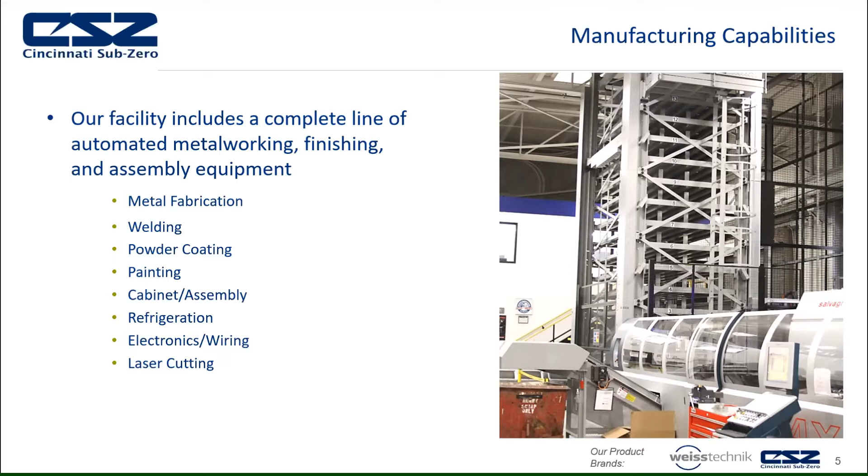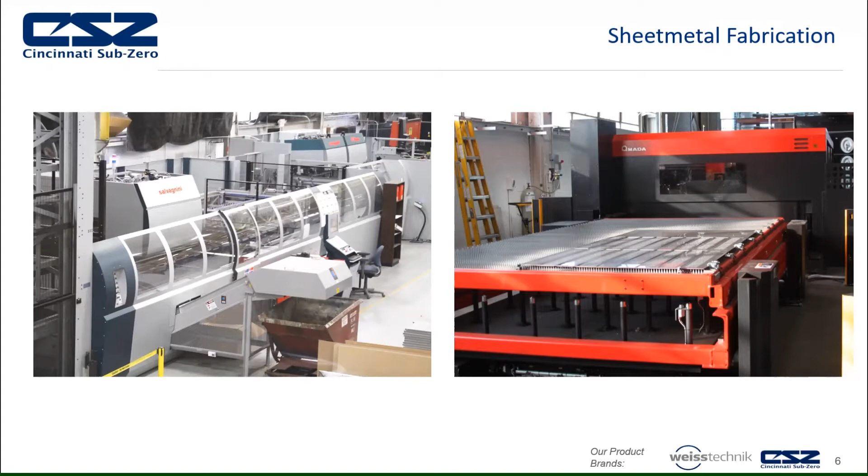This is a shot of a couple pieces of automated equipment that we have. We have a Salvagnini, which is a very nice automation tool. It has an auto feeding rack, which you put just flat sheet metal into. It goes through the Salvagnini, it gets processed and bent, and out the other side comes fully formed parts. So it's very nice to add as much automation as possible for the chamber manufacturing. And then we also have punch presses, benders, everything else that you need in order to build chambers.

Service is a big deal for environmental chambers in general, and we have a very dedicated group of service people that are direct, and then we also have our service partners like SciTech that handles Mexico for us. And between all of these different aspects and capabilities, we feel we have a very, very good coverage, and actually the best coverage out of any chamber manufacturer in the world.

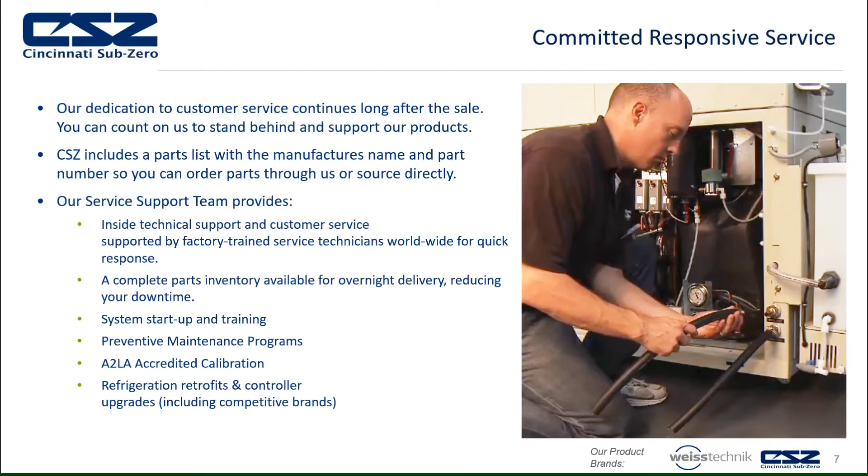So some of the nice things that we're able to accommodate for our customers are system startups and trainings, preventive maintenance, A2LA accredited calibration, refrigeration retrofits, controller upgrades, for instance. And we'll even do controller upgrades on other chamber manufacturers' products as well. So should you have an older Thermotron chamber or some other manufacturer and you're converting over to Cincinnati Sub-Zero brand, you like our controller, we're able to upgrade that for you. So please let us know.

So we will now dip into the stability chamber review portion of the presentation, specifically the reach-in chambers. So what is a stability chamber?

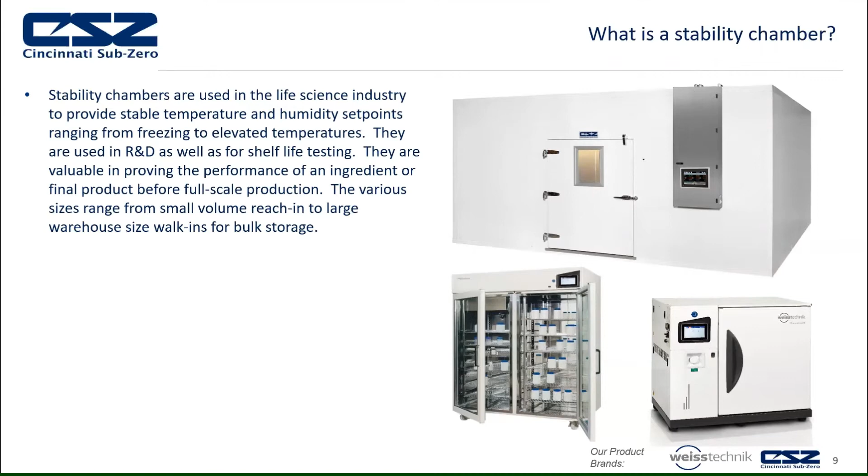Basically, stability chambers are primarily used in the life science industry, but they are used in other industries as well, cosmetics for instance, and biomedical. The function of a stability chamber is to provide stable temperature and humidity set points ranging from freezing to elevated temperatures.

This is a picture of a very large stability chamber that we manufactured and has some very high and large shelving for bulk storage of items.

Stability chambers are critical to delivering life-saving products to patients safely and quickly. CSZ understands the importance of providing reliable and precise chambers to ensure tests are completed in a timely manner and adhering to any FDA and WHO standards along the way.

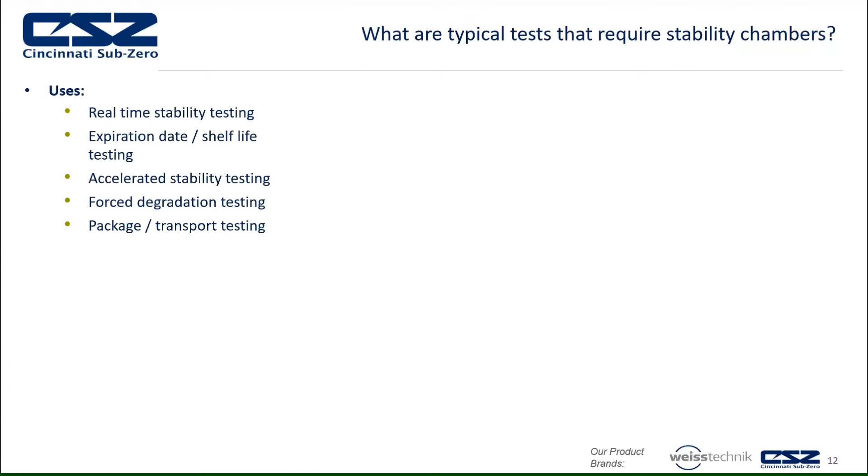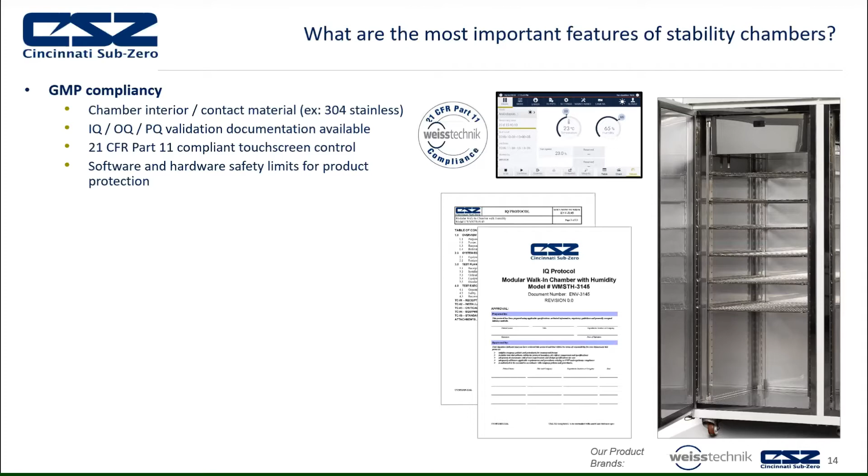21 CFR Part 11 compliant touchscreen control is very important and something we offer standard in our stability chambers. Software and hardware safety limits for product protection is also key. High accuracy sensors - we utilize RTDs in lieu of thermocouples because they are more accurate and reliable. Capacitive humidity sensors are also very key and something to consider when selecting a chamber.

High efficiency design is key, not only because it utilizes low power and low heat rejection into the room, which means you don't have to recondition the air twice, but it also equals low operating expense, saving money in the long term.

Low noise level, minimal noise pollution into the lab and adjacent work areas is something key to consider when selecting a chamber. Compact design and mobility, low weight, rollability, and easy fit through doorways are all key items to consider.

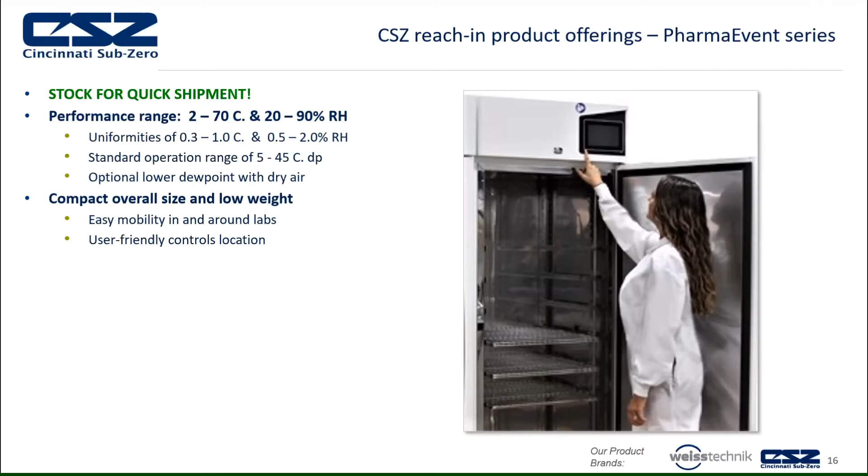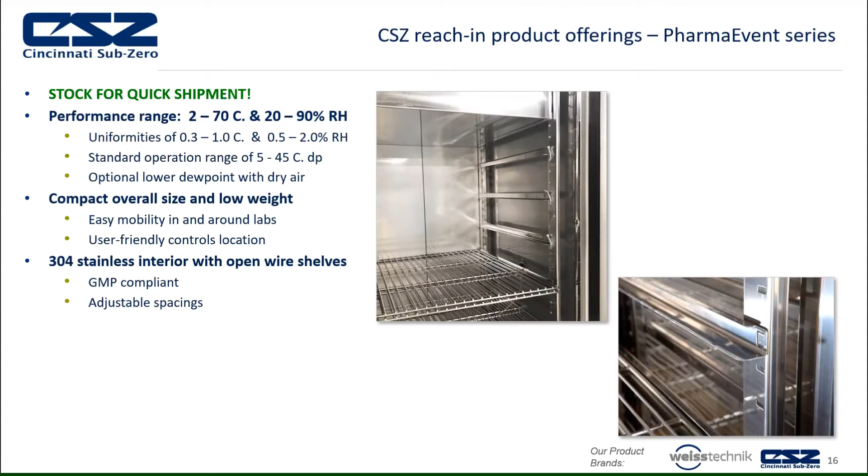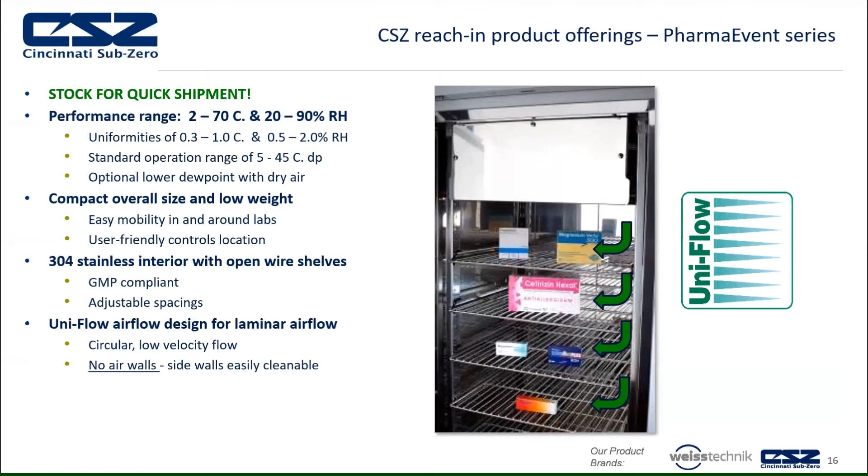304 stainless steel interior with open wire shelves, GMP compliant adjustable spacing for the shelves. We have a Uni-Flow airflow design for laminar airflow, circular low velocity flow, no air walls, sidewalls for easy cleaning. The integral water tank is nice because you're able to conceal the water tank behind the skin of the chamber, so it looks very nice, but you're able to access that water tank through a port and fill it up as needed.

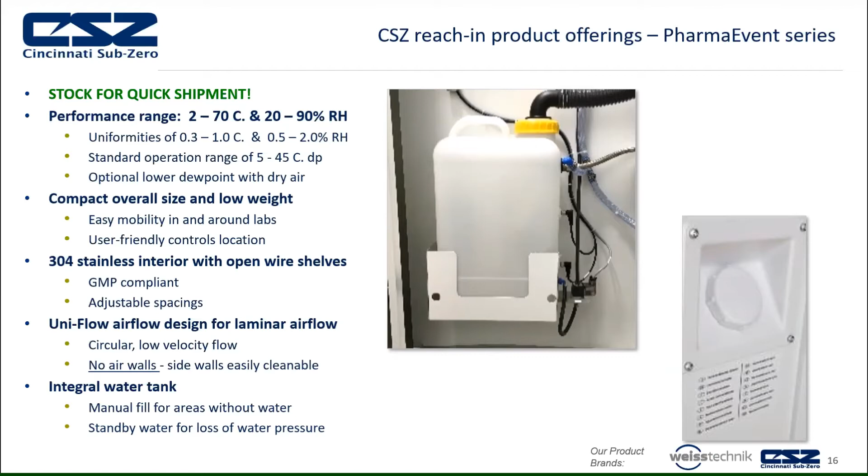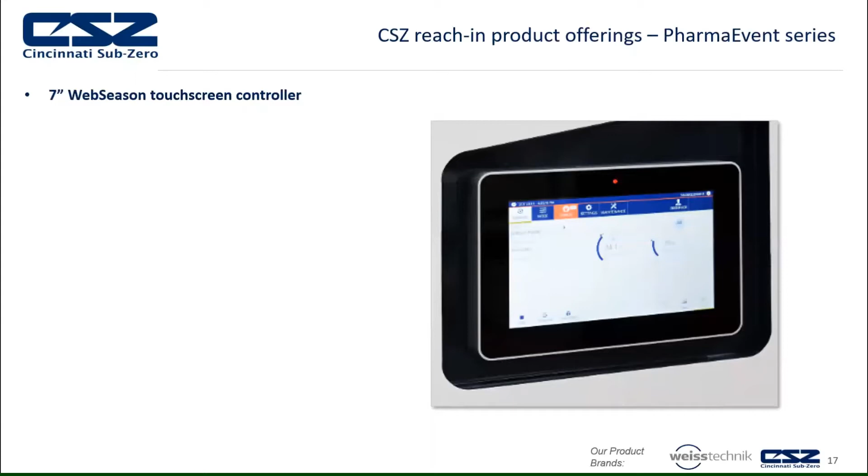So we'll talk a little bit about our touchscreen controller. We offer on this chamber a 7-inch WebSeason touchscreen controller. The touchscreen controller is intuitive in its operation, and it is 21 CFR Part 11 compliant.

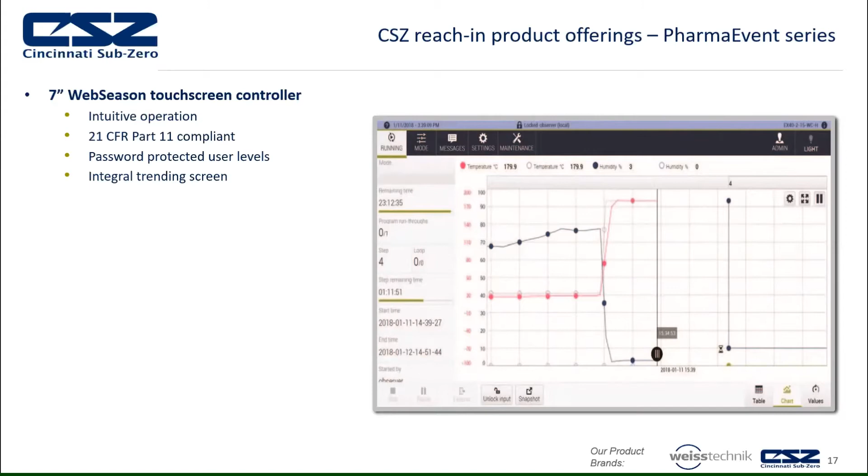It has the ability to password protect user levels, so you can assign user levels to have that user access only certain areas within the controller and run certain tests. There's an integral trending screen for data logging, which you can view on the controller itself or export for viewing on a computer. Event history and alarm screen is also standard.

And we offer this in multiple languages, so you can adjust it to Spanish, for instance, and the controller will read in your language.

For analog comms, we have 0 to 10 volt DC standard, wired Ethernet, RS-232/485, and Sympati, which is a software we offer that can interface with our WebSeason controller and work with your cell phone, tablet, or laptop to extract data and control the chamber remotely, which is really nice.

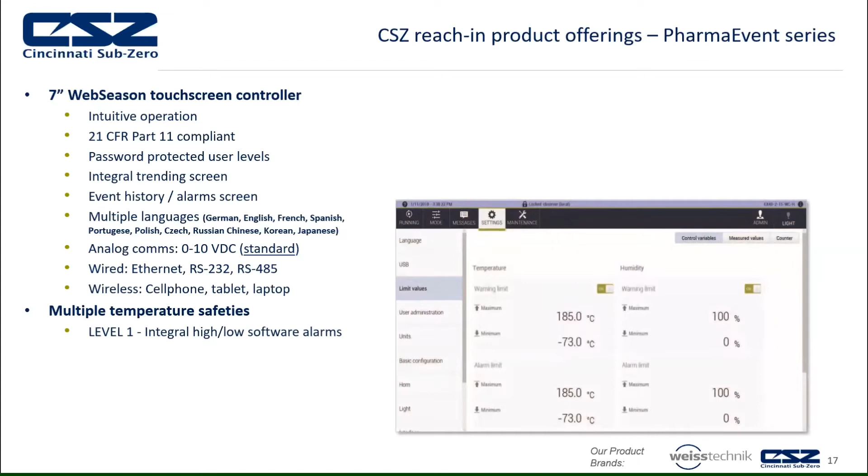We have multiple temperature safeties: a level 1 safety, a level 2 safety with independent high-low monitor, and a level 3 independent high thermal fuse. And again, the highest accuracy instrumentation, utilizing a 4-wire stainless steel RTD with very high accuracy, and a capacitive sensor for humidity at 0.5% accuracy.

The Pharma Event Series is unique in that we have a special boiler system for this product line called the System Steam Sterile. Basically it's a boilerless humidification system where we have a heater block that's hot, and we drip water onto that heater block, where it's vaporized and then goes into the chamber area.

By taking this approach to humidification, we're able to achieve a much tighter control point as well as save power, because you're not using a typical boiling humidifier to introduce water into the chamber area. So it's a lot more power efficient and saves money in the long run.

It's also contamination-free and sterile humidification, so you're not introducing any contaminants into your environment, which is also key. It's very energy-efficient with low heat rejection, power consumption of about 2,000 watts max, and heat rejection of only 1,000 watts max. We offer whisper quiet operation—again, something you should consider when trying to select the right chamber for your lab and your application.

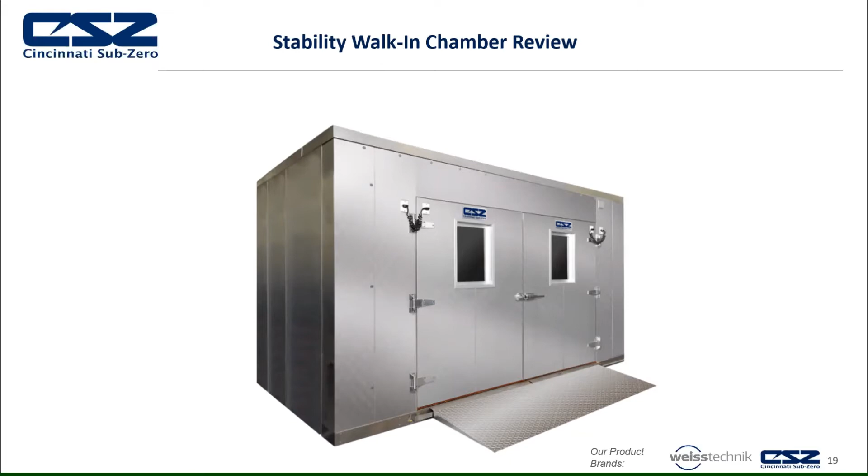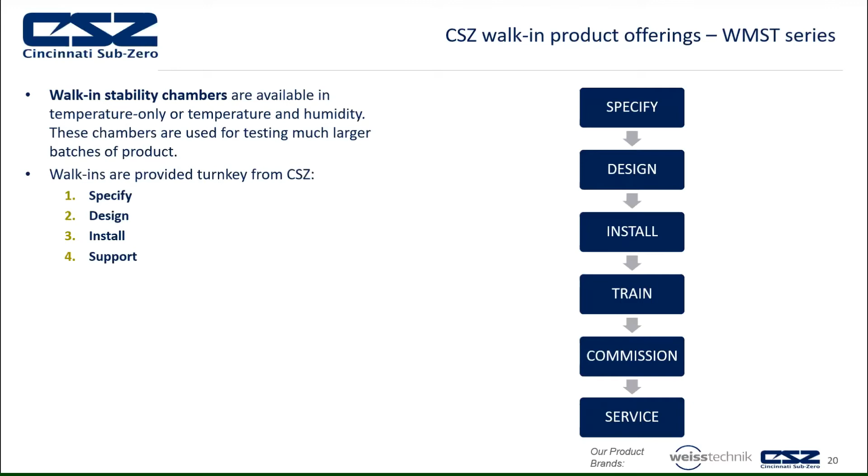Walk-ins are provided turnkey from Cincinnati Sub-Zero. You would work with our sales team in the field who works with our applications engineers to come up with a concept and a design. Once ordered, we will deliver the system to you, work with you on the install, get it installed, provide training, and then commissioning of the chamber, and also after-service support. As I touched on earlier, we have the largest network of service available for any chamber manufacturer, so we have you covered when it comes to this.

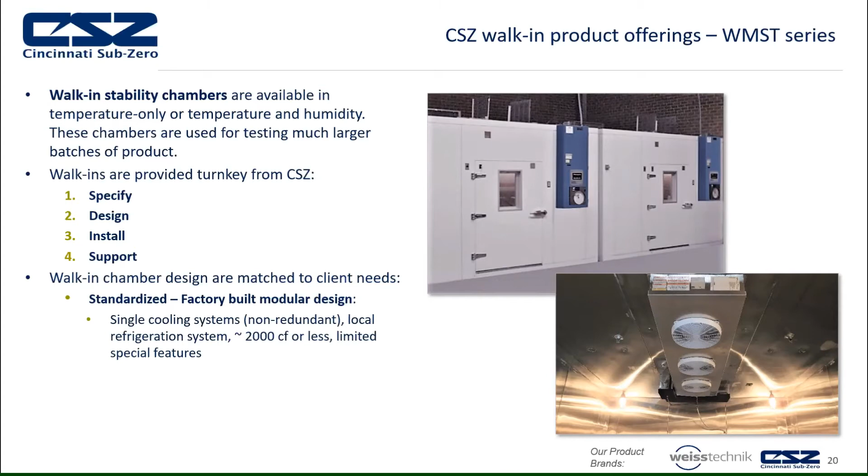Walk-in chamber designs are matched to the client's needs. Our standard factory-built modular design consists of a single cooling system, which is non-redundant, a local refrigeration system, and some limited special features. Options are somewhat limited for our standard product offering just because they're already pre-configured and ready to be released. But we do offer a very large variety of custom applications. So if you have an application that doesn't necessarily fit within our standard product envelope for a walk-in chamber, we can design exactly what you need based upon your requirements. That is not a problem whatsoever.

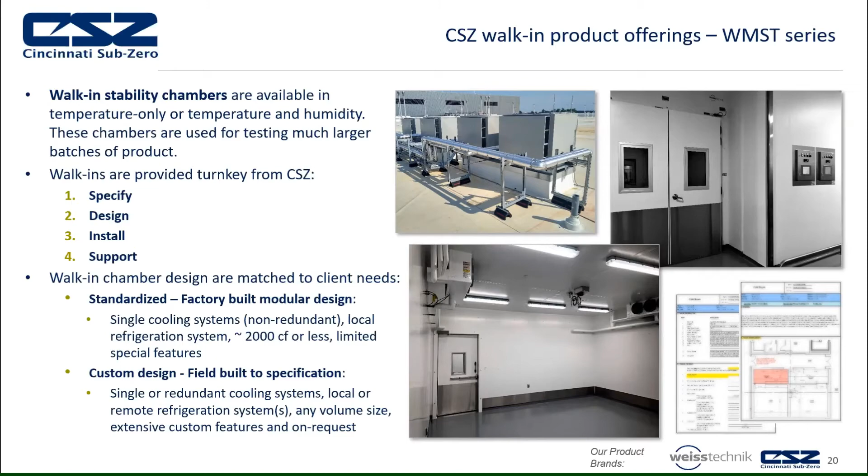Base temperature for our standard walk-in chambers runs between -20C and 60C. It consists of single stage refrigeration cooling. The control tolerance is 0.3C or better. The base humidity range is 20 to 95% RH, limited by dew point, with a control tolerance of 2.5% or better.

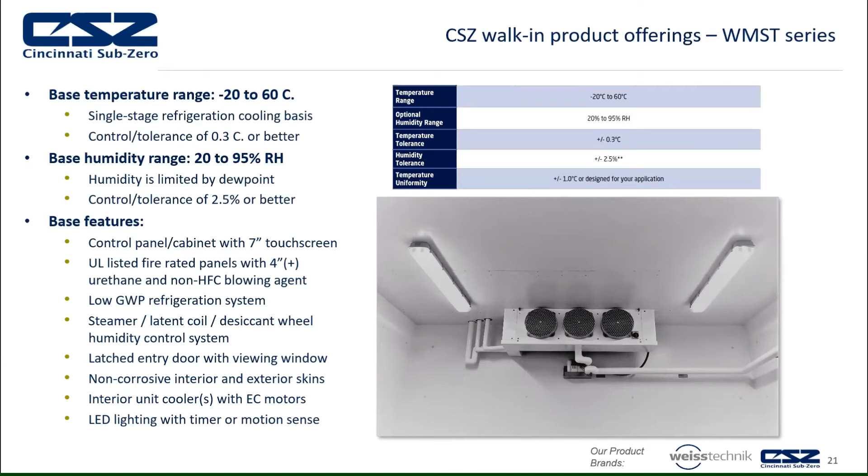Base features include a control panel cabinet with a 7-inch touchscreen controller. We offer a UL listed fire rated panel that's 4 inches thick, low GWP refrigeration system, a steamer, latent coil, and desiccant wheel humidity control system—all some of the base and standard features. It also has a latched entry door with viewing window, non-corrosive interior and exterior skins, an interior cooler with an EC motor, and LED lighting with a timer or motion sensor depending upon the application.

So that covers some of our walk-in modular solutions. Now we're going to transition into something that's kind of unique for Cincinnati Sub-Zero, which is a combination cold ultra-low storage room.

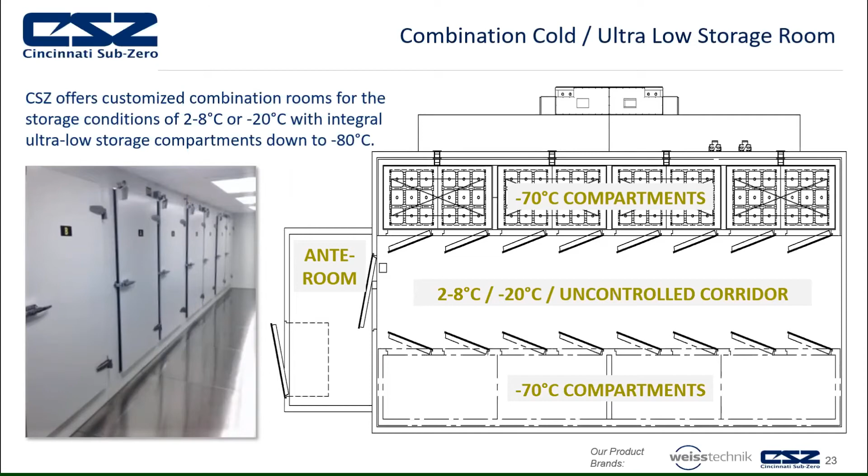So what is a combination cold ultra-low storage room? It's an application where you'll have possibly an ante room that you enter into, which is already cool and somewhat dehumidified. Then you go into the main corridor, which is an uncontrolled corridor cooled by the -70 compartments surrounding it. Typically you can run the uncontrolled corridor at about 2 to 8 or -20. Then you can see we have -70 freezers that surround the corridor—these are independent freezer access points for product, which is very useful, and we'll touch on that moving forward.

This is a bulk storage picture of kind of a traditional layout of how this might look and be deployed within your space. You would enter into the 2C to 8C area where you can have shelving and racking to store your product. From there, you transition into the -20° area and store product there for a period of time. Then you surround that -20 with -70 or -80° individual storage freezer compartments, which is a very nice option to have all of this combined in one area.

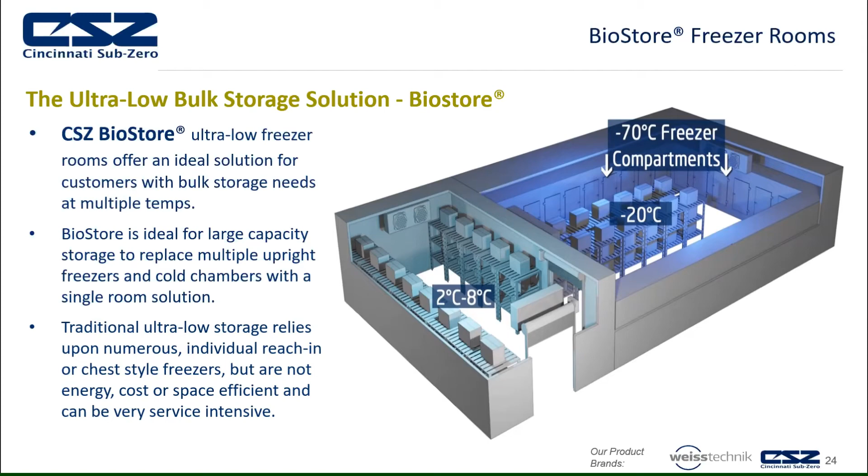These rooms offer the ideal solution for customers with more bulk storage needs at multiple temperatures. BioStore is ideal for large capacity storage to replace multiple upright freezers and cold chambers with a single room solution. Traditional ultra-low storage relies upon numerous individual reach-in or chest freezers, and this saves energy, space, and service.

So what is the BioStore advantage? We have multiple ultra-lows, -70 or -80 cooled freezer rooms, and we have a redundant approach to this. So you'll have an A system and a B system.

The systems will automatically toggle between each other, possibly on a daily basis, to make sure that you're defrosting the system that is not running. While the secondary system, the B system, is running, it's keeping your freezer room at the ideal operating temperature. This also provides a level of security because should one of the systems go down, you're able to still maintain all of your product within the cold storage area.

Redundant external conditioning allows the A and B systems to oscillate and defrost, and then provide uninterrupted operation at -70. The redundant cooling unit provides operation for critical type applications that cannot warm up for any reason.

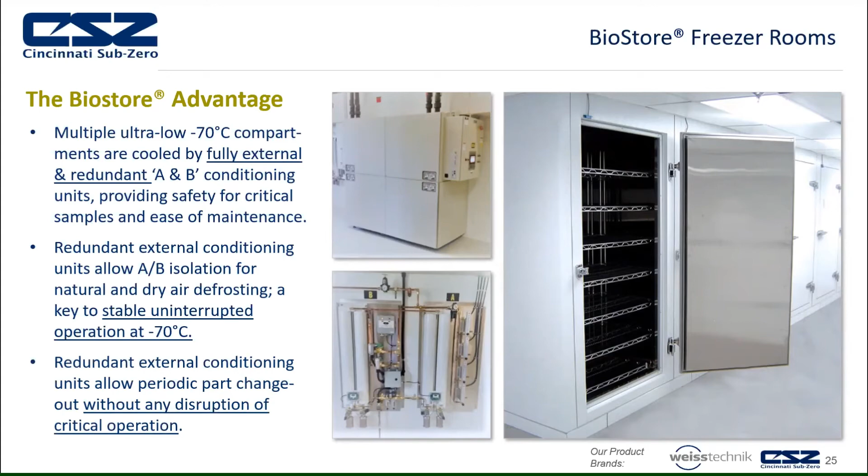So the advantage is ultimate product security via mechanical and electrical A and B redundancy. And a nice part about this is that you can add a third redundancy to it - you can add optional LN2.

So let's say you have a power outage, for instance, and the two mechanical systems go down. If you have it on a UPS backup, you can automatically transition over to LN2, and LN2 will then provide your primary cooling and keep your freezer room at the desired temperature until power is restored.

Reduction in the number of refrigeration systems. So if you're currently doing your ultra cold storage in chest freezers, for instance, you'll have chest freezers all over your lab floor space. By doing this, you reduce the amount of lab floor space required.

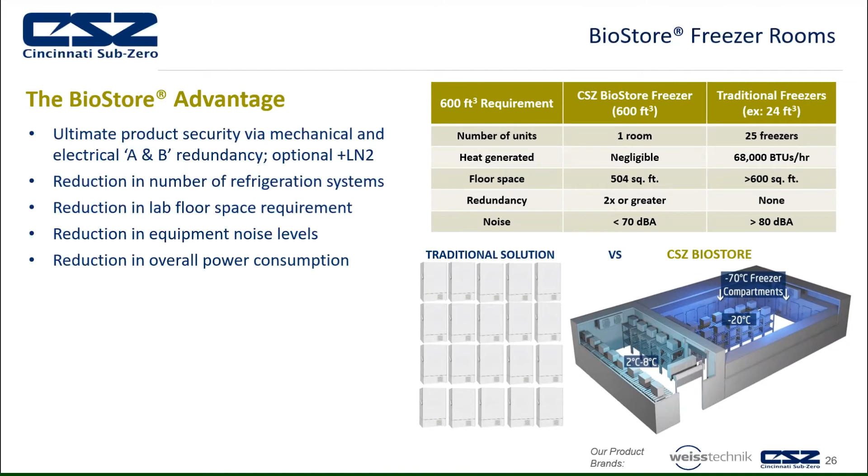Reduction in equipment noise - you have one system that's running versus multiple lab freezers and/or walk-in freezers throughout your lab. Reduction in overall power consumption, as you have two compressors versus a multitude of compressors with the other approach.

Reduction and elimination of heat rejection into the building. These systems are configured to be either water cooled or remote air cooled, so none of the heat being generated by the cooling system will be rejected into your lab.

Reduction in electrical installation as well. Reduction in facility renovation and upgrade dollars. And reduction in validation and recalibration is another key factor, something that can add up as you're having to change out chest freezers.

Reduction in annual maintenance - you have one or two mechanical systems running versus a multitude of other systems scattered throughout your lab space.

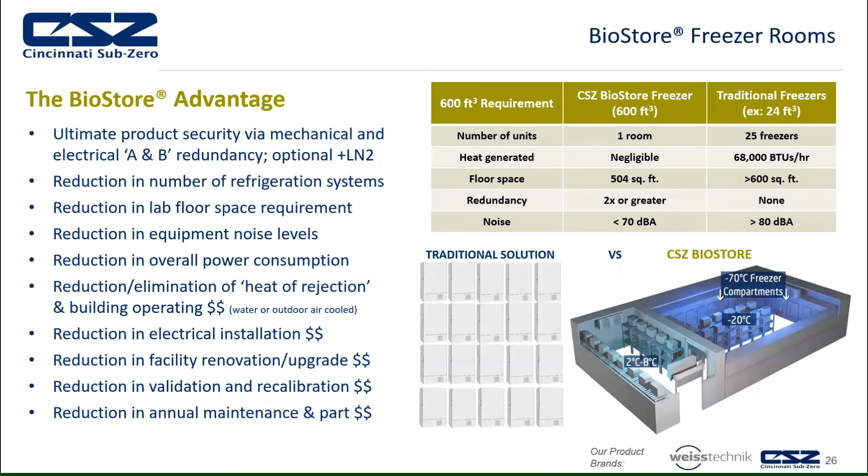So what are the design considerations? What do we need from you in order to provide you with a proposal for one of these? We need to understand your temperature requirements - what are you trying to do, how many rooms do you need, and what do those temperature ranges need to be?

And what does your requirements look like for storage? Incoming product temperature - how will the product be delivered into this freezer area? Will it already be frozen? At what temperature? So then we can calculate what the loads look like.

Incoming product delivery method - how do you plan on getting the product into the 2 to 8, the -20, or the -70 freezer compartments is key. Building support needs: square footage for the room installation, and square footage for the mechanical system support, where that'll be located.

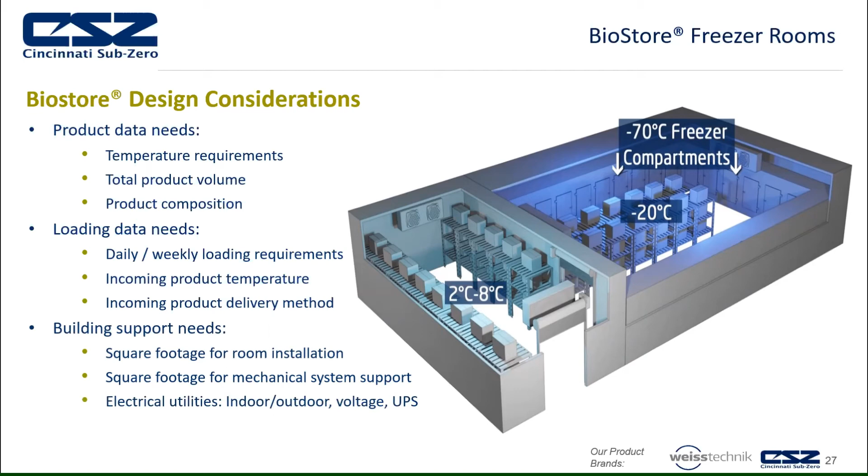Electrical utilities, indoor and outdoor - voltage, and do you have a UPS available? Mechanical utilities: water, LN2, compressed air.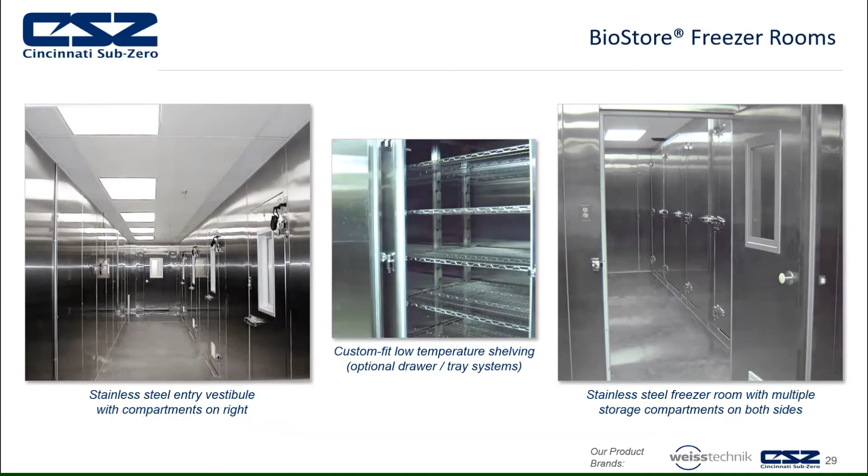All of these are capable of coming with stainless steel for easy cleaning. We also have custom fit low temperature shelving and drawers and trays that can be added to the freezer rooms or compartments, and stainless steel with multiple storage compartments. This is a view of how that might look for you. And this would be an illustration showing a layout drawing, conceptual sketch that we would generate for you to open up the discussion and talk about what the right configuration is for what you're trying to accomplish.

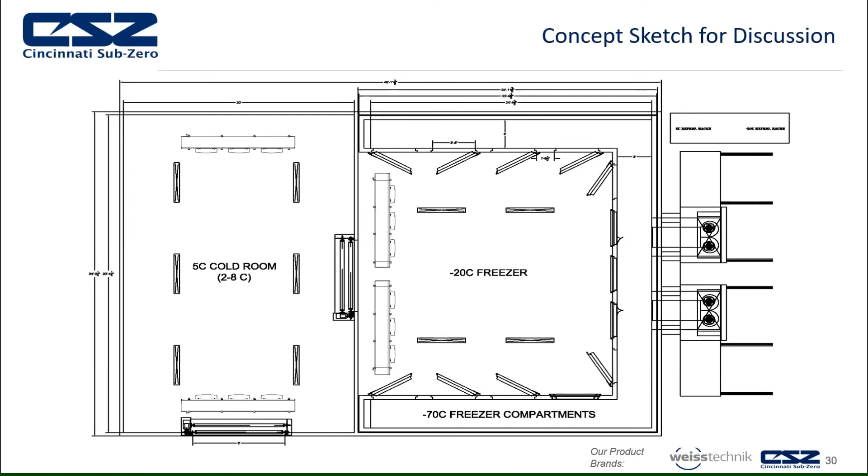Leonardo? Thank you very much, Glenn. Very interesting topic. Let me see if we have any questions here.

Okay, we have one here. It says, is there any difference in the energy consumption of the equipment if the door is made of glass or some other material? Yes. So if you have a glass door, you will get some heat loss within the system, so the compressors would potentially run a little more than they would if it is a solid insulated door. So yes, there is a slight difference between the two designs.

Okay, thank you. And there is another one. Is data logging over an IP network possible? Sorry, Leonardo, I didn't understand the question. I think it's related to if the data of the tests is possible to transfer via IP network. Sure. Yeah, so we have RS-232 and 485 communications available, which can be utilized for that. And then if you also utilize our software package, S!MPATI, it is very easy to pull that data off and manipulate it on your desktop computer.